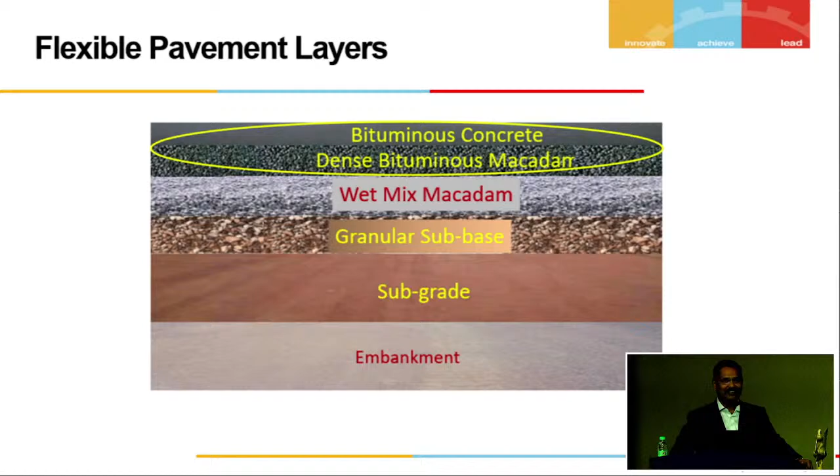A typical flexible pavement, which we all know, but I will concentrate only on the top bituminous layer, which is more than 50% of the cost. In that, it will only be the surface layer because the cracking is from the top, not from the bottom. The word sustainability was spoken a lot, and it is quite commonly used these days.

So I also put that design for sustainable pavements. Why do we design the pavements? It is to support the load, smooth riding quality, and good drainage.

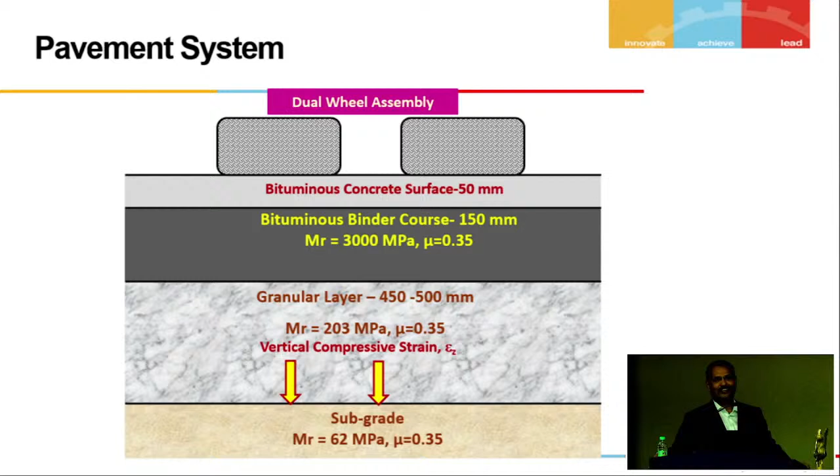Only two critical strains we consider, and we have been considering all these days. One is the compressive strain on top of subgrade and the tensile strain at the bottom of bituminous layer. But there is something beyond this these days. We also need to consider the shear stress between the tire and the pavement. That is what I will stress upon and speak on those topics today.

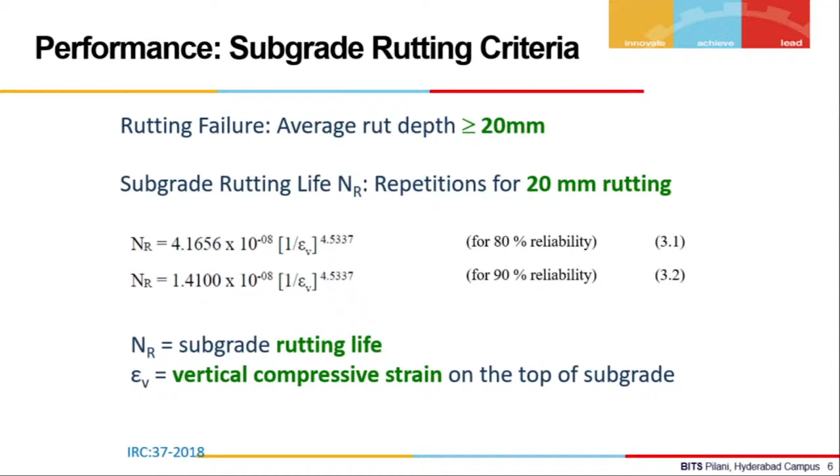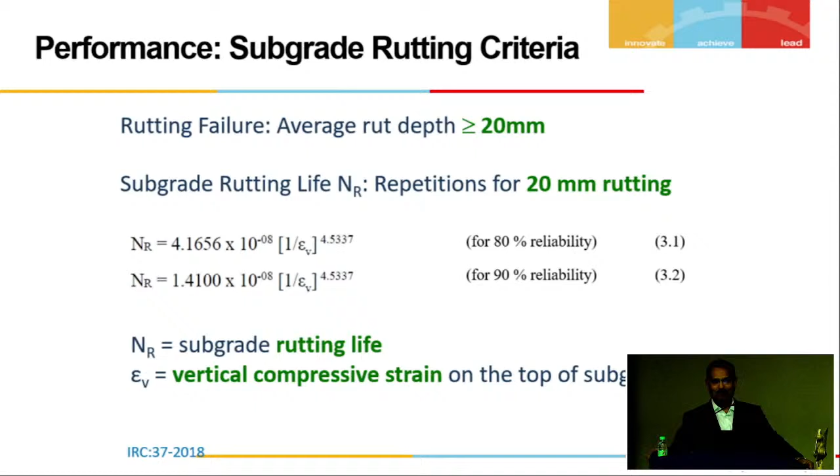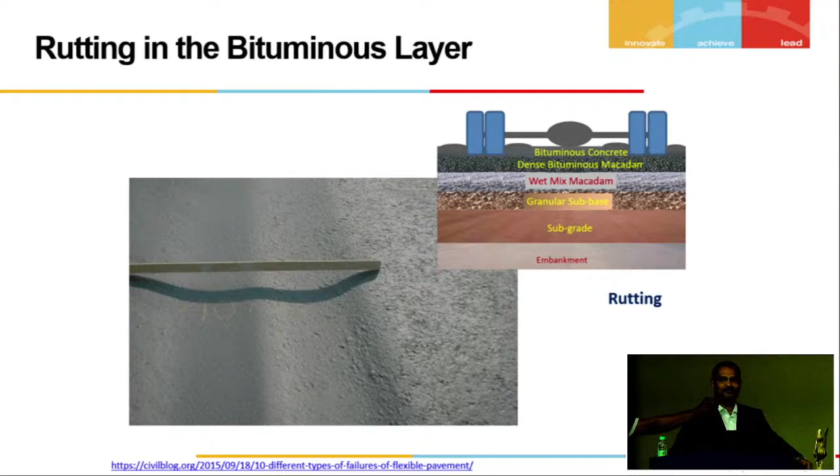We use the reliability equation. It is not the design reliability. It is only reliability to say how the subgrade behaves, and whatever rutting happens on the subgrade will get reflected on the top in this form. If I say it is rutting only because of subgrade, it may be true or it may not be. It could be because of the asphalt pavement itself. The rutting could be in the asphalt pavement itself.

And then we actually check for fatigue failure. Earlier it was very critical because the asphalt layer thickness was quite less. So bituminous macadam in open graded mixture was used. So there is high possibility of cracking from the bottom. But in present day, with the use of dense mixes like DBM, high modulus asphalt layers, this is not very critical.

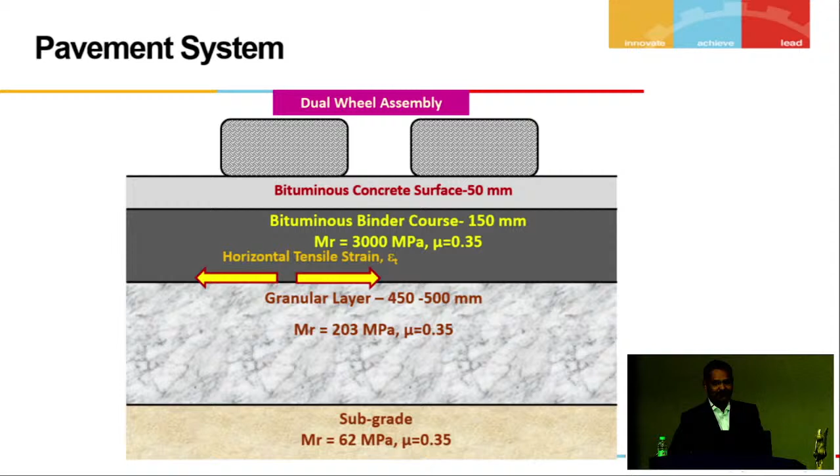Generally, we provide around 200 mm thick asphalt layer. It could be either at the bottom of the wheel or in between the dual wheel.

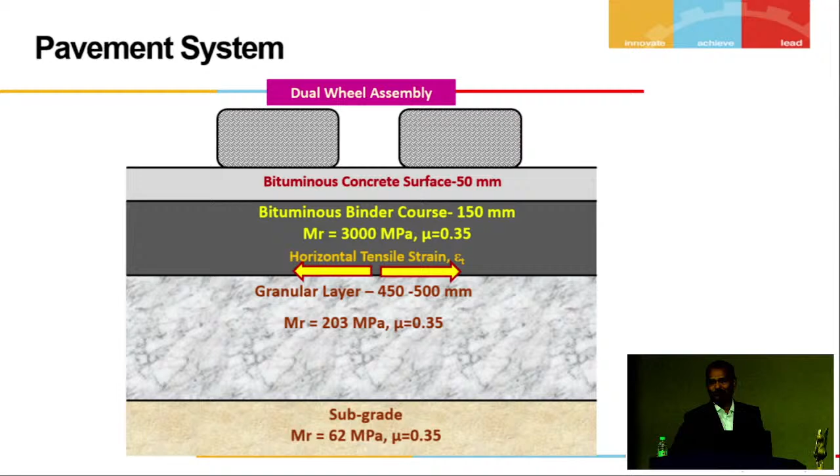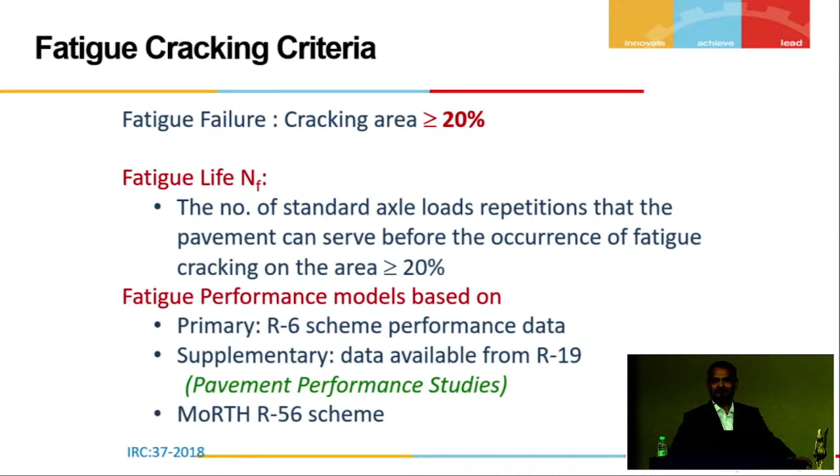But there is a lot of mistake happening because of this. We sit and design telling that the voids in the bitumen, or the effective volume of bitumen is 11.5%, air voids is 3%, but very, very challenging to achieve on the field. But when we design considering that 11.5 and 3% air voids, we get a C value in the range of 3. So our fatigue life improves by 3 times. So we reduce the thickness. Reducing thickness should not be the solution all the time. This is based on some of the observations what I have made.

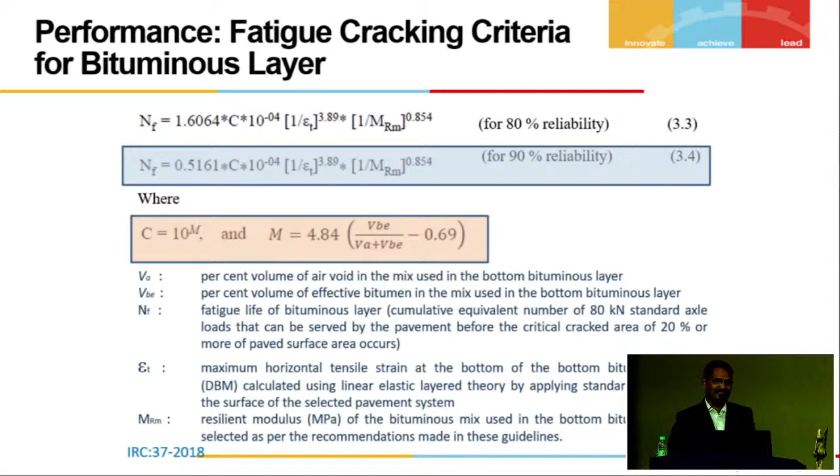There was a site where within 3 years, the rutting had occurred. And the rutting is so severe that it had gone up to 40 mm rutting. And they have used highly modified bitumen, PG76E-10. But still the rutting had occurred.

And then when they adopted this rich bottom bituminous layer, the thickness was 160 mm. But if you assume C as 1 and design the pavement, it is 250 mm what is required. Almost 100 mm saving, is it worth? And within 3 years it failed. It is supposed to last for 20 years. And using PG76, it is supposed to last for much more than 20 years.

And then we see this cracking, which is fatigue cracking. Generally, we have a feeling that it is only from the bottom, but just by observation, we cannot say whether it is from the top or from the bottom. But our design is considering that it is cracking from the bottom.

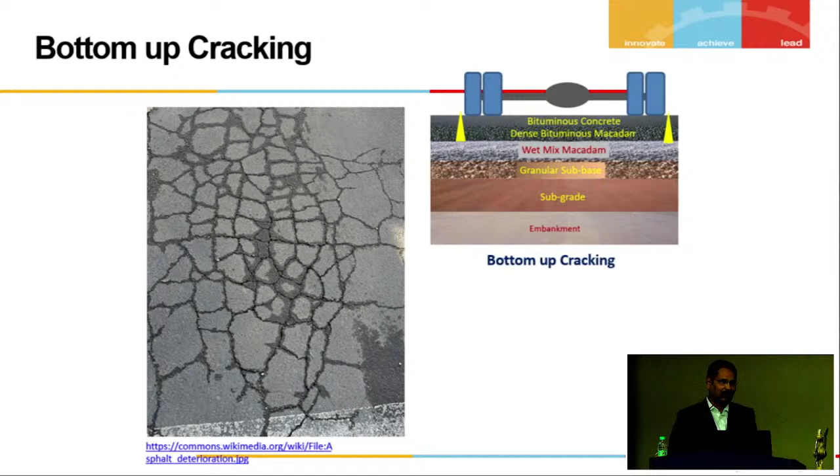And then we design based on traffic. We always assume that VDF given in the IRC.

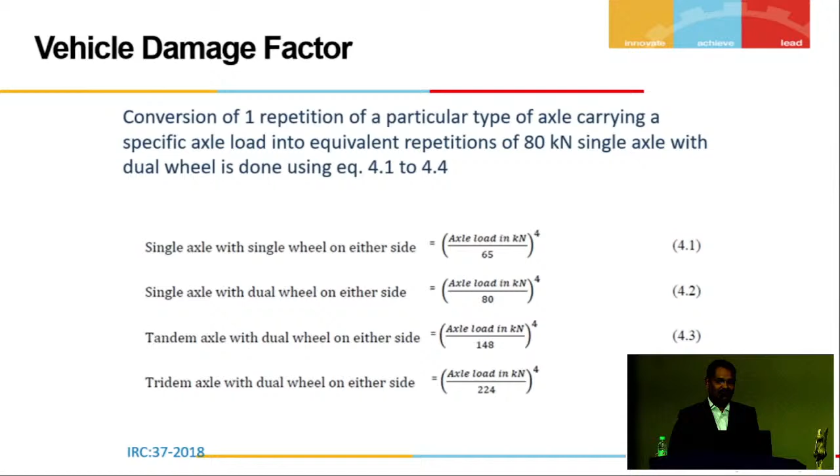But many a times that is wrong. I would like to quote one example here. We have to carry out the axle load survey. The former engineer-in-chief of Telangana had a very different design of pavement.

He used to do only 30mm BC, and paved many roads with the same budget, and it worked in many places. So I was appreciating him, and we were having a discussion. He said only one thing was bothering him.

There was one road which failed within 8 years, and that happened to be the former CM's constituency. It was in 2023, so he took me there and we went around. I asked, sir, what was the design traffic? He said 10 MSA, because this is a state highway but not much traffic on this road. So it was designed for 10 MSA.

Okay, fine. But within 8 years there was rutting, some cracks, and potholes too. When we were traveling to that road, I found many trucks passing by. I said, sir, if you give an opportunity, I would like to carry out the axle load survey at this location.

He said, please go ahead, and he also visited with me. His name is Shri Ravindra Rao Garu, with respect I call him Shri Ravindra Rao Garu. We went and did the axle load survey.

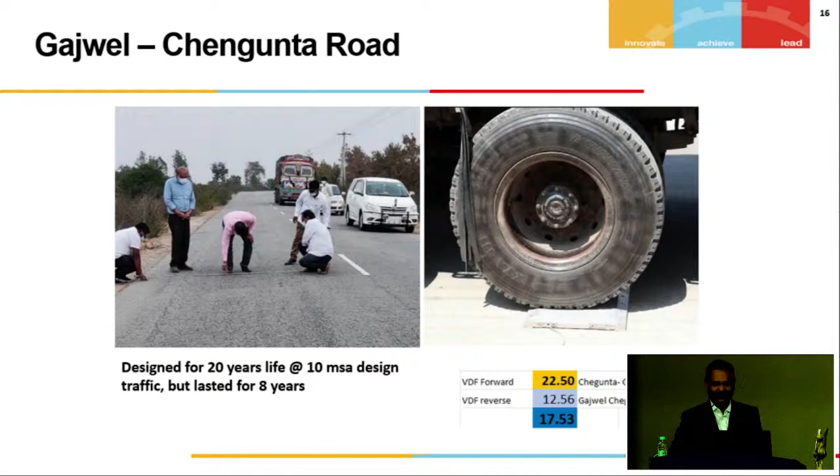So how do we achieve this sustainable road? Design-wise, yes, we did that. How can we achieve it? There are various means of doing it. Now what we take is the shelter of polymer modified bitumen, which is 1.6 times costlier than conventional bitumen. Or we can use fine-grained crumb rubber with encapsulation.

This was something which I did, and I have filed a patent on this. You can encapsulate crumb rubber so that you don't have to heat the bitumen. When you heat it, there is settlement. In cold form, you can put it into the pug mill and get the mix.

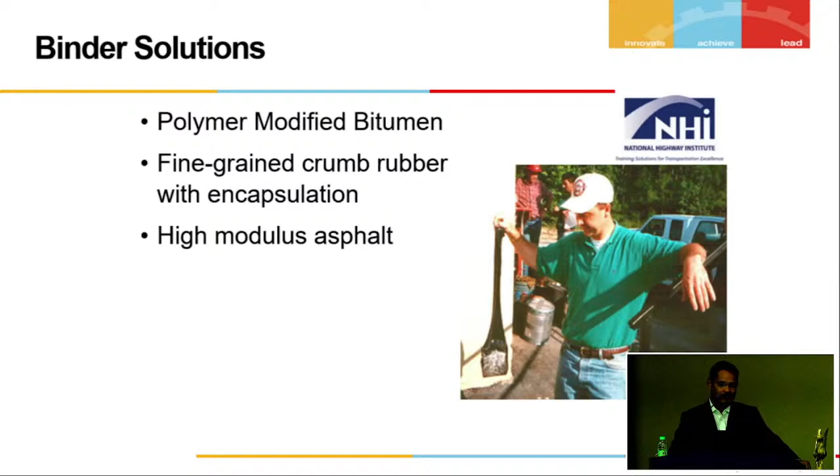I've tried it with various mixes, various number of times, and it has worked, but I don't know how it works at a big scale - that's what I'm waiting for. But in any mini mixer in your own lab with 30kg, it works, no need of heating the bitumen. Or these days we talk about high modulus asphalt, which is a DBM layer, so we get it from a batch mix plant.

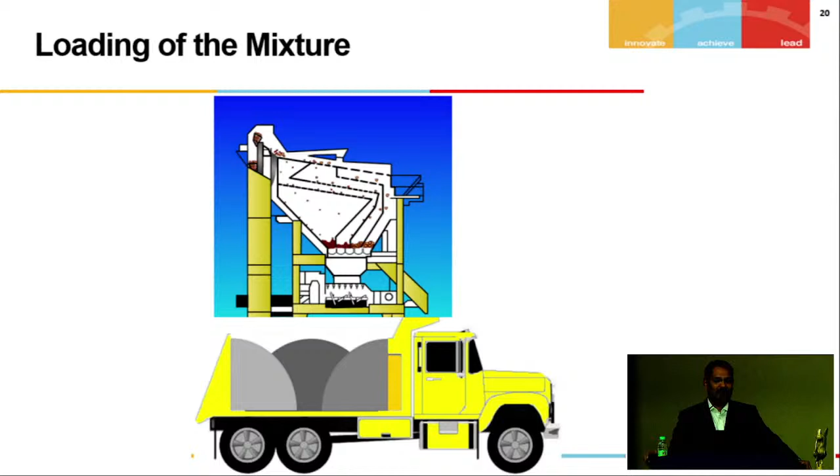And then we get it onto the truck, take it to the field, roll it, finish. We feel that we have done all our duty. We also check the temperature, we will see how the mix temperature is when it is rolling. If it is too hot, we allow it to cool down. If it is too cold, I don't know what to do there. And then we also check for density.

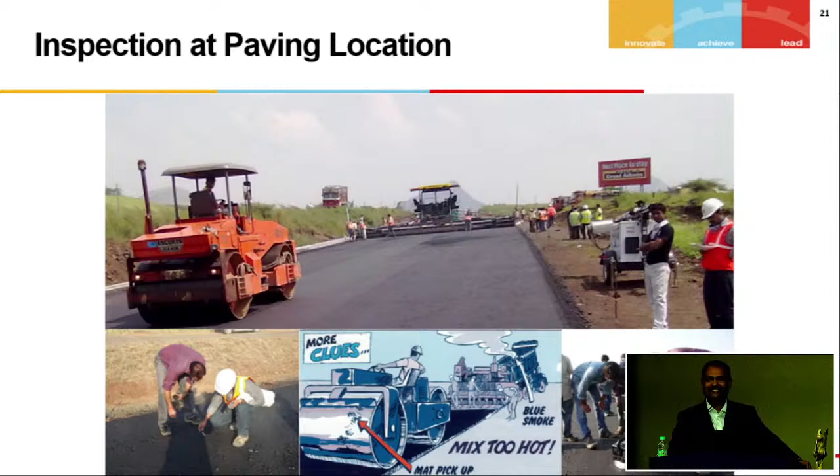All this is done. Or we can also use an infrared camera. We used it in one of the projects, from the plant to the site, how the temperature varies. This was for a warm mix asphalt, but it can be used for any other asphalt. You know how the temperature varies from the plant to the site on any particular day based on the temperature. So this gives an indication of when we finished our compaction.

Like sir was mentioning, everything is data driven. Yes, it is data. It is proven data. I can write the location, I can say what time, where, which date, what truck had come. So we followed all quality control.

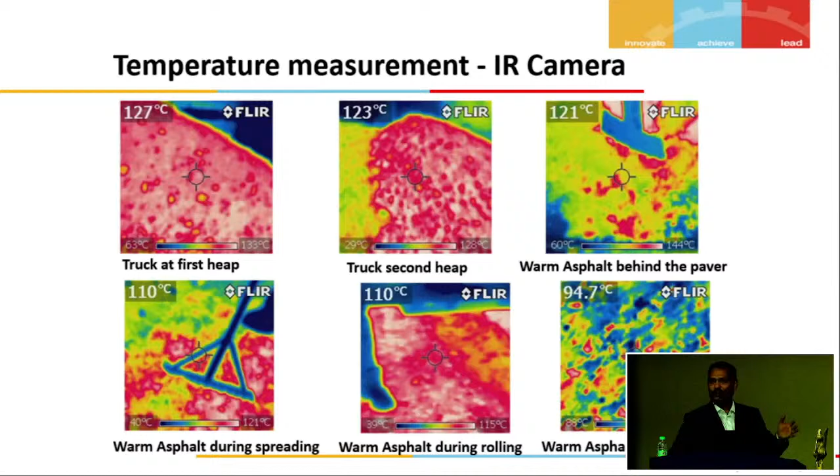And while rolling, we said let us follow 4 rules. What are those 4 rules? How many passes are required to finish the width? How many passes to achieve the required density? Whether the mix was hot or not, and what should be the speed of the roller.

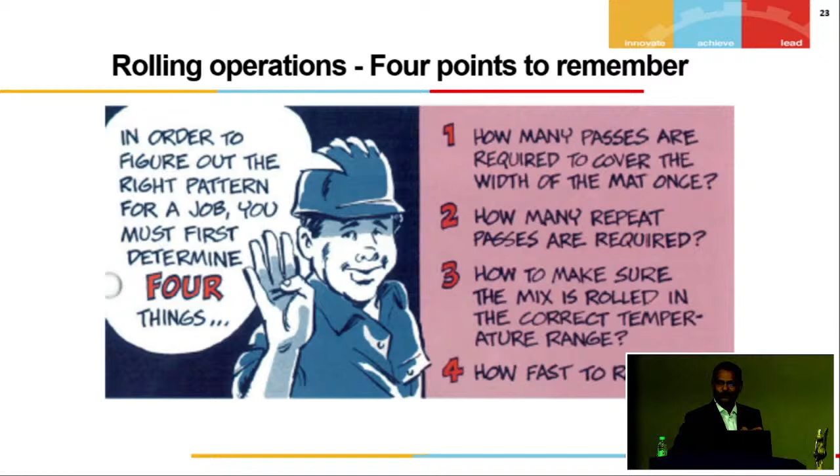All these are followed because every engineer wants to do quality work. Let us not blame any of the engineers here. They all want to do quality work, but still we get failures which are premature.

First thing, it goes with our perception. We have some experience, we go with the perception, not data driven. We see rutting within the first 3 years or first 2 years. In fact, I had predicted this will rut, and in fact it got rutted within 3 years. It is as high as 40 mm.

So the next blame we say is maybe the rich bottom bituminous layer. I cannot speak on this. As I told, if I give this question to AI, it will give me some answer. Maybe it is correct and maybe not. But I don't have that authority to speak on this, but this is an open statement, and it is a topic for thought, whether rich bottom is the one which leads to premature rutting. I don't know, it is still an open statement. It can go with perception, but not with data.

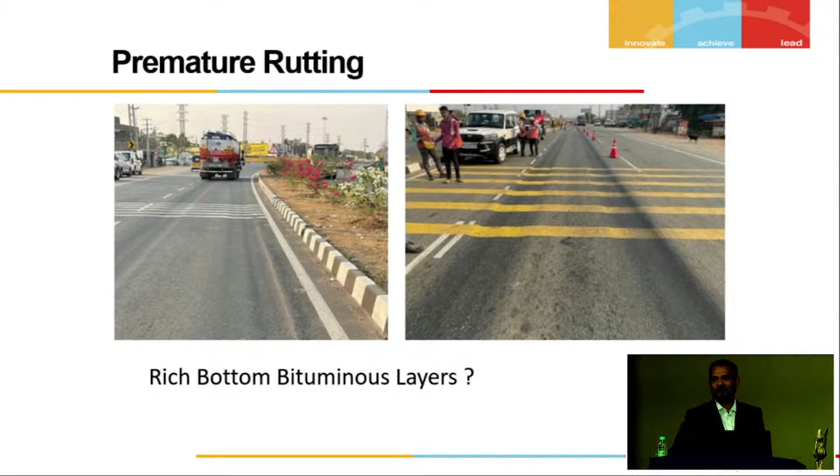The other one we see as premature failure is top-down cracking, which can occur within 6 months to 3 years from the date of construction. But it is very difficult to say whether it is from the top or from the bottom. The only way is you have to cut the core. It becomes destructive testing, but there's no other option. You cut the core to know whether it is from the surface or from the bottom.

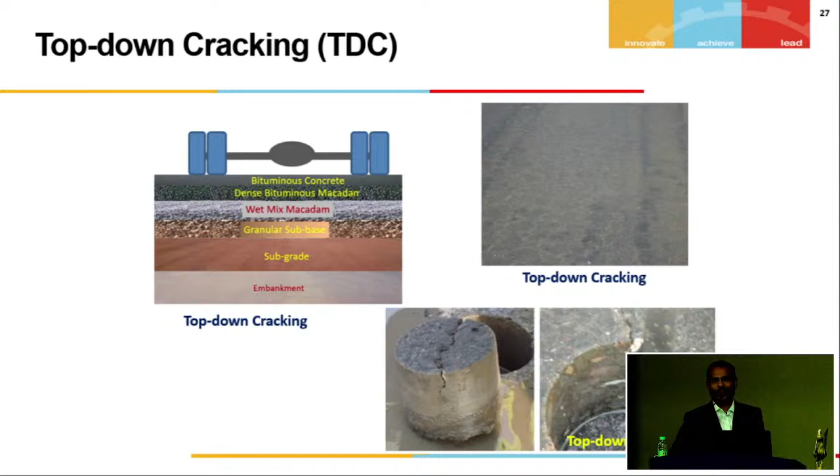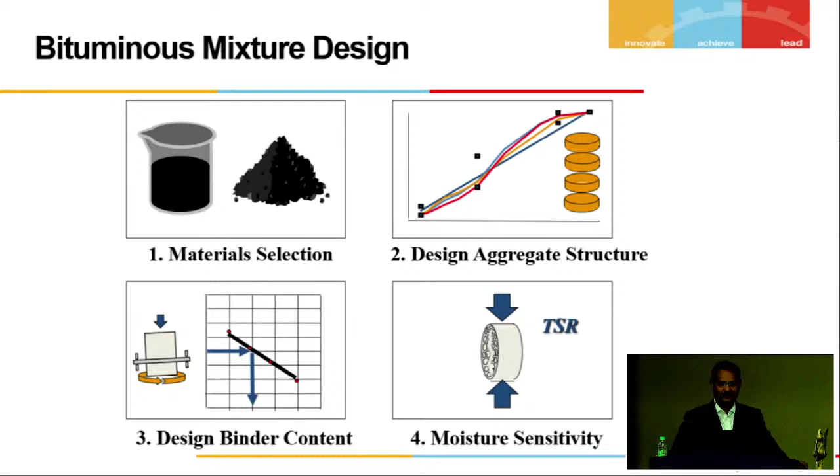So we always think it could be because of the mixture design, the gradation was not followed. All these are perception. Or maybe moisture damage, or maybe the aggregate was not coated properly, or the rolling pattern was not followed.

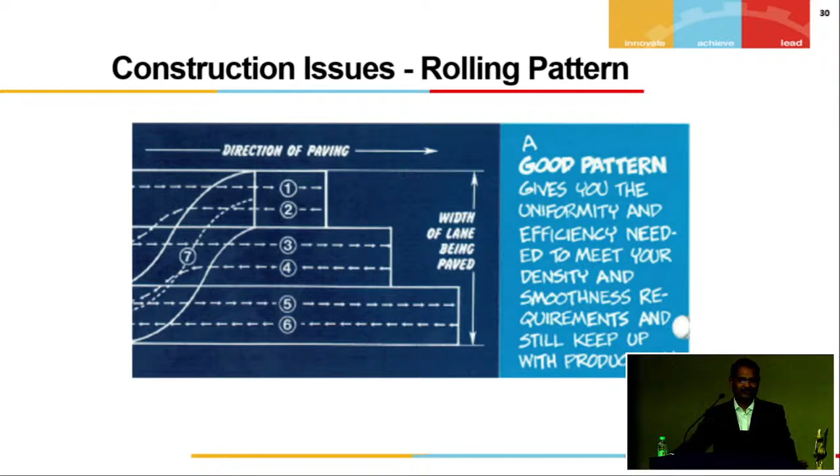I would like to give a different perspective. What could be the technical reasons? I'm not saying the other perception is wrong, there is no wrong answer on this earth. The only thing we look for is an appropriate answer. If you write any competitive exam, 4 answers will look similar, of which 2 you can eradicate, but 2 look very similar. Still we have to choose the most appropriate answer in a similar manner. What we have to see is the appropriate reason for this failure.

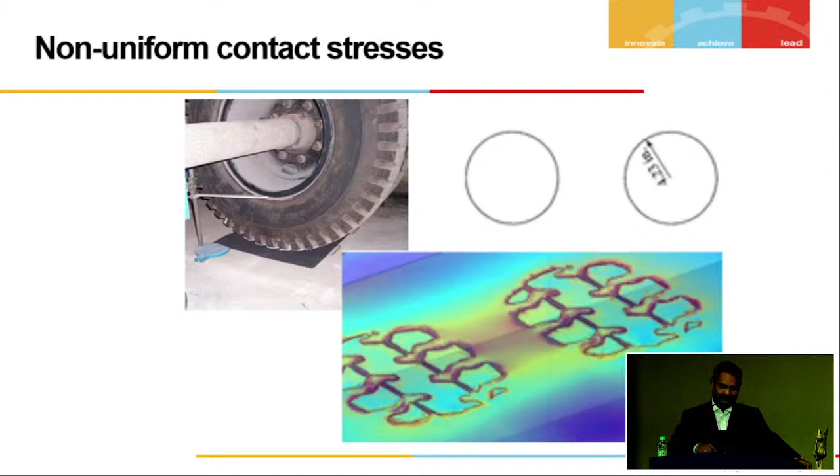Most of our layered elastic theory speaks of circular loading, but actually the truck load is never circular. It's not elliptical as well. And then the treads play a very, very important role. For the truck it is very good, for the road it is very bad, because it induces highly tensile stresses or strains on the surface, which is quite high compared to what the material can face. This leads to surface cracking, and this is one of the technical reasons.

And because of these treads, I use a 0.56 MPa tire pressure, but if I actually measure it, it is 0.74 MPa. Nobody will go with 0.56 though. I have seen trucks with 1.4 MPa. If that is 1.4 MPa, the actual pressure on the pavement will be 1.8 megapascal.

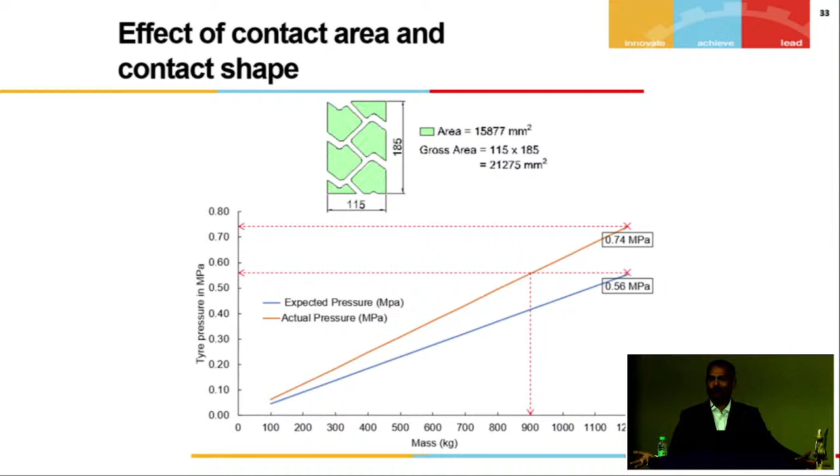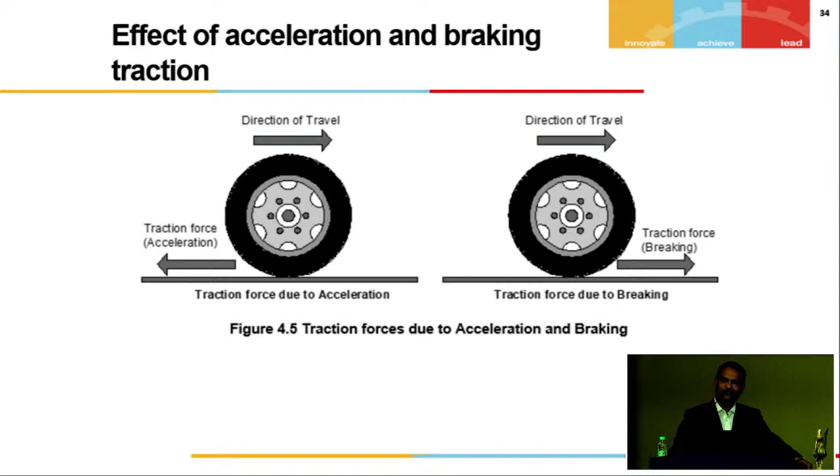Also, we always think of the truck as static in nature. It is not. We design the pavement for a moving truck. When a truck is moving, there is rolling force, acceleration, and braking. If you see on any approach road towards a bridge on the embankment, we see a lot of rutting or surface cracking. It is because of the change in gear, there is acceleration. So there is a traction force which comes horizontal along with the vertical load, and that induces surface cracking.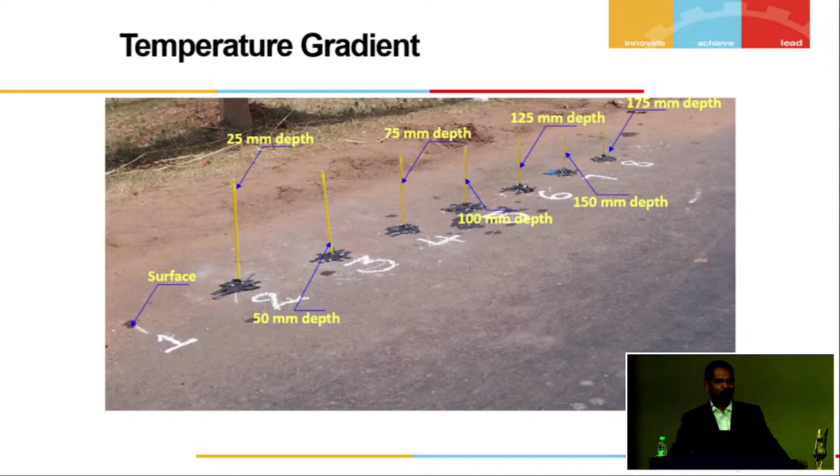One more reason is we always think the temperature along the depth of the pavement is uniform. It is not. There is a gradient within the temperature from the surface to the depth. So I measured it in one of the national highways, that was during my PhD time, and even now it is valid.

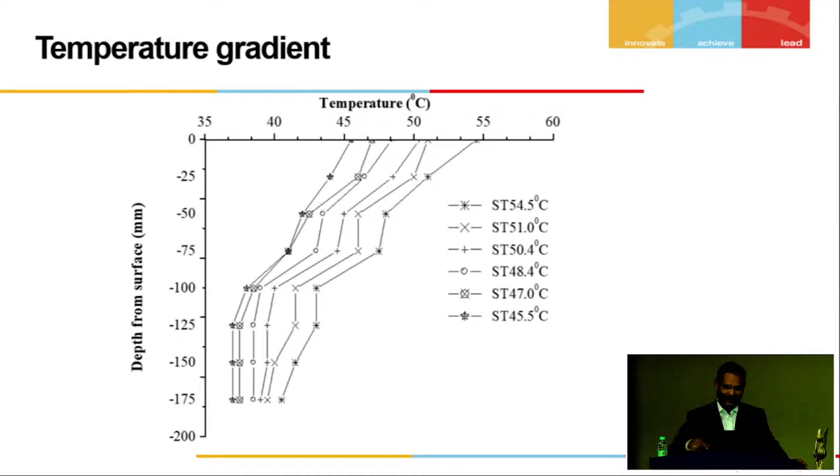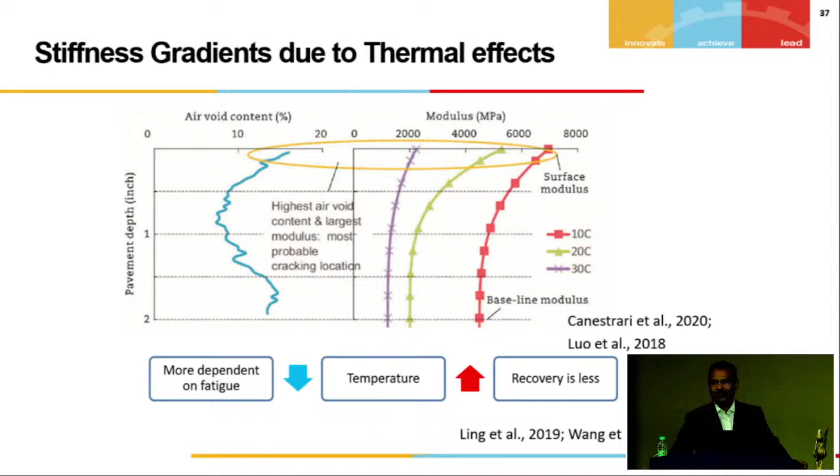Because of this temperature gradient, there is also a stiffness gradient. How does it matter when there is a stiffness gradient? When the mix becomes very soft on the surface and there is a rolling force or a braking force, there is a traction force which creates a transverse crack which will not be healed, because the top surface gets aged faster. The binder on the top surface ages much, much faster than what it ages at the bottom.

So I did not speak about this, about bitumen. Short-term aging, yes, as soon as the mix is done, it is short-term aged. Long-term aging happens over time, but if the air voids are more than 8%, the long-term aging within the top 20 mm is accelerated. This is not based on any literature alone, it is based on observation in the field. We have studied this for 3 years on a monthly basis, because if you go after 6 months, something would have happened and we don't know when it happened.

It is like observing a patient in the hospital every now and then. We observed it every 1 month, and thanks to Sri Ravindra Rao Garu, who asked us to take up this project on a monthly basis.

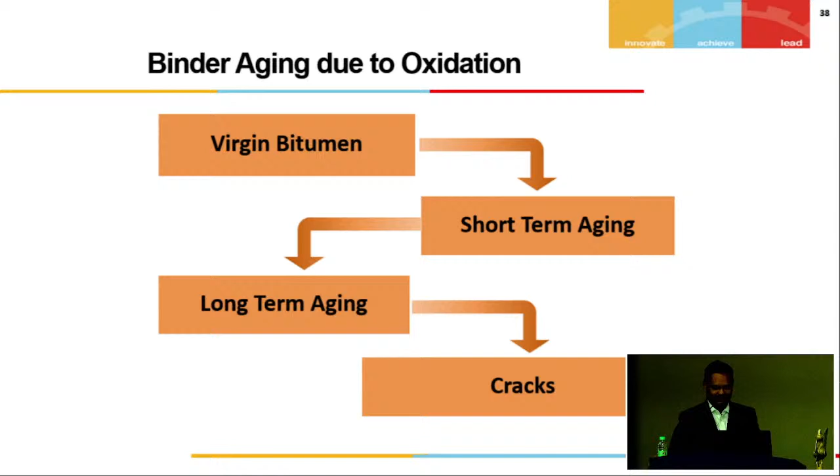It is very difficult to do this using the layered elastic theory, because the tire is not uniform along one side. You can't even do a 2D analysis. In USA, they can do 2D analysis because their treads are different from us—it's a steel radial tire. Ours is a nylon tire.

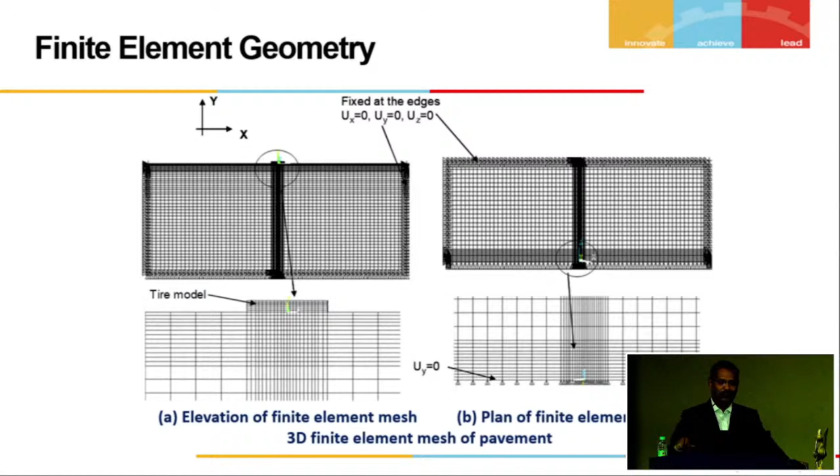What we use is a bias ply, a nylon at 45 degrees, one over the other, which will have 12 plies. So it is a 3D finite element. This was the typical tire which is being used in India. So we tried to find what will be the effect if you do a 3D finite element analysis.

And we have to use some failure criteria. I cannot just define and say that yeah, there is high stress and it fails. There should be some limitation, some reference point to say when does it fail. That's why in highway engineering or pavement engineering, we never consider stress for flexible pavement. We always consider strain, whereas for rigid pavement, we consider stress as the failure criteria.

So I had to arrive at some point, so I used octahedral shear stress, which is almost similar to that of von Mises, but in a different style. Here, ITS is the failure criteria we used, but we can also use the present-day CT index test as the failure criteria, though these are crack propagation, not crack initiation. These tests are only for crack propagation, not crack initiation.

A 4-point bending test would be ideal for crack initiation, but it takes a long time. So this is a very simple test. I use this and set 0.47 times of sigma yt based on some of the literature.

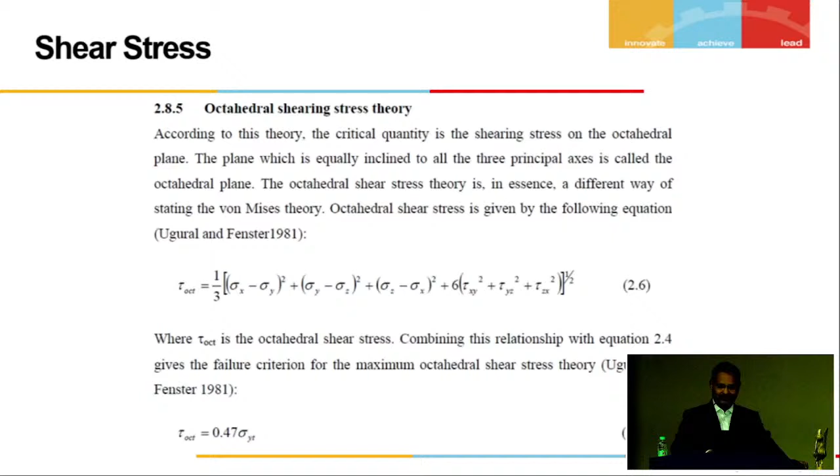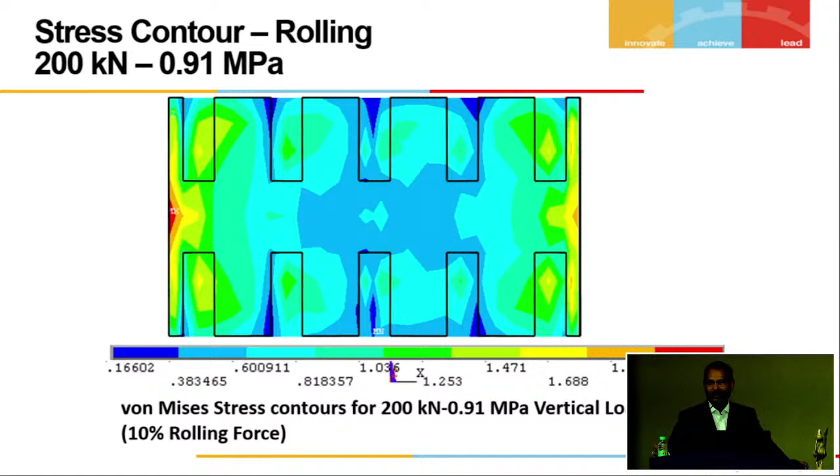But later on, it leads to map cracking, because once the initiation happens, it no more obeys Hooke's law. It is no more elastic in nature. The continuum is lost. The cracking can be in any shape. So along the wheel path, what you see is a block type of cracking or a map type of cracking or an alligator cracking, not only one single longitudinal cracking for the tires what we have in India.

And when there is a braking force, it is behind the tires, especially when there is a severe braking in the afternoon of a summer, you see a crescent moon failure on the road pavement, and that is because of the braking force. And one more thing is, the interface between DBM and BC will be smooth at that location, so that 40 mm or 50 mm just slides away, and what you get is a crescent moon failure.

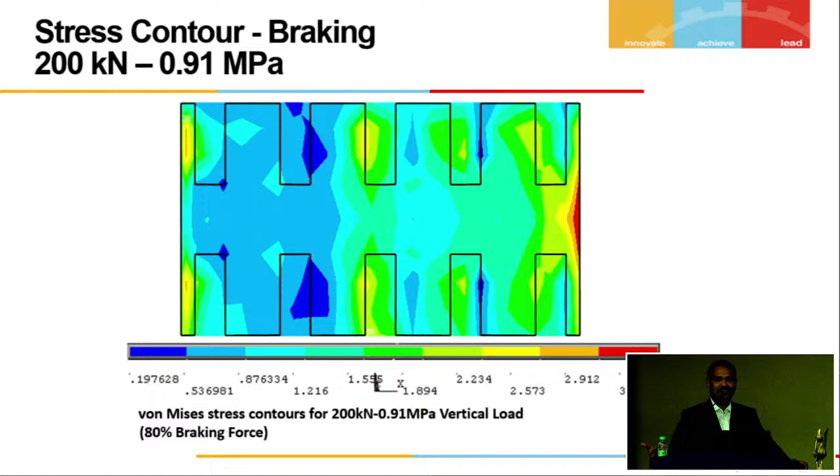I try to put that in the form of octahedral shear stress ratio. That is, whatever stress I get, the maximum stress divided by the octahedral shear stress value. You can see everywhere it is red, meaning every movement is critical. It can initiate top-down cracking.

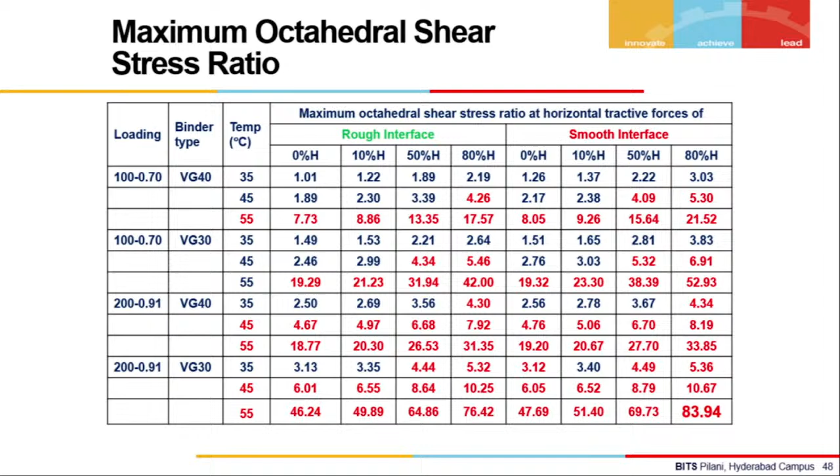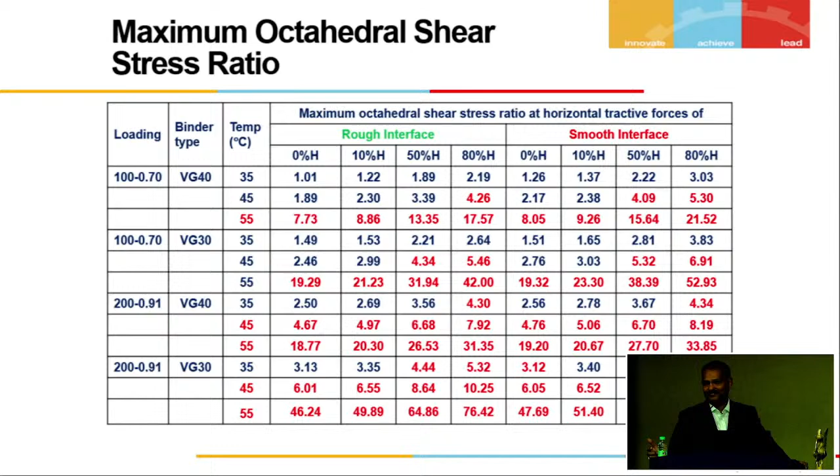If there is no healing effect, if the bitumen does not heal on its own, it is completely aged, it will definitely crack. But if there is a healing effect, the cracking will delay. It will take more time to crack than expected.

This is how a linear elastic theory gives. At the center of the wheel load, we say there is not much of a stress, but at the bottom, the stress or the strain is quite high. So that is a bottom-up cracking.

That is correct. But when we consider a tire as non-uniform contact stress, and because of the rolling forces, the stress on the surface is much higher than that of the bottom. What we use in most of our analysis is this type, but what actually happens is this one.

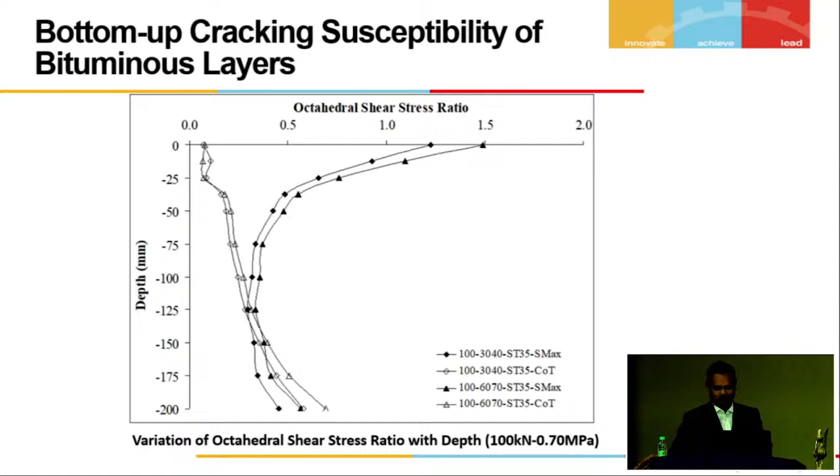So every pavement is bound to have surface cracking. I am not wrong, you can visit any site on the present day scenario. Within 4 or 5 years, whatever cracks we are seeing, it is not bottom-up cracking, it is top-down cracking. If the loading is increasing, this becomes even more severe.

And I mentioned about smooth interface condition. When there is no bonding between DBM and BC, what will happen? The stress between the layers is much higher. So if there is a crack initiation, it follows to full depth within no time. And that is for a standard load I have shown.

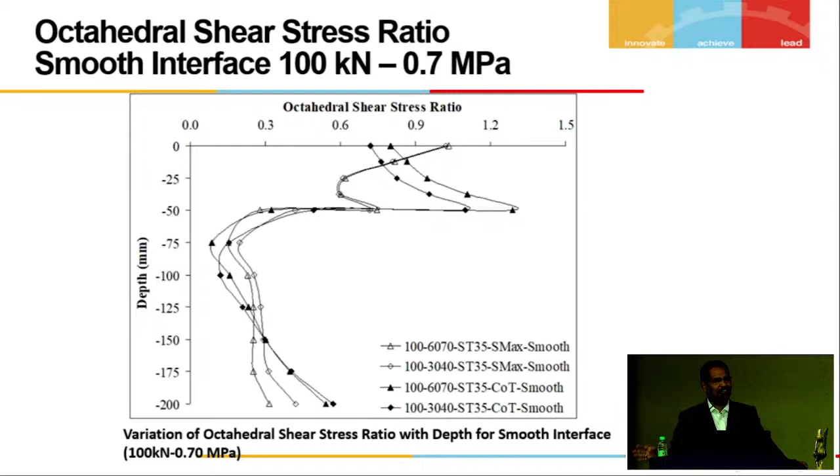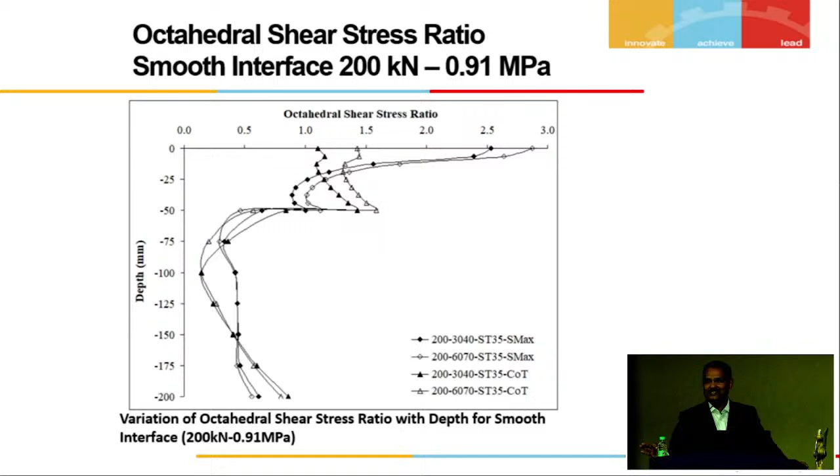If I want to express for a heavy load, even there it is critical. The surface cracks first, and it goes to full depth of BC layer, not full depth DBM I'm not talking about, up to BC layer. I will show a picture. Seeing is believing, I will show you a picture.

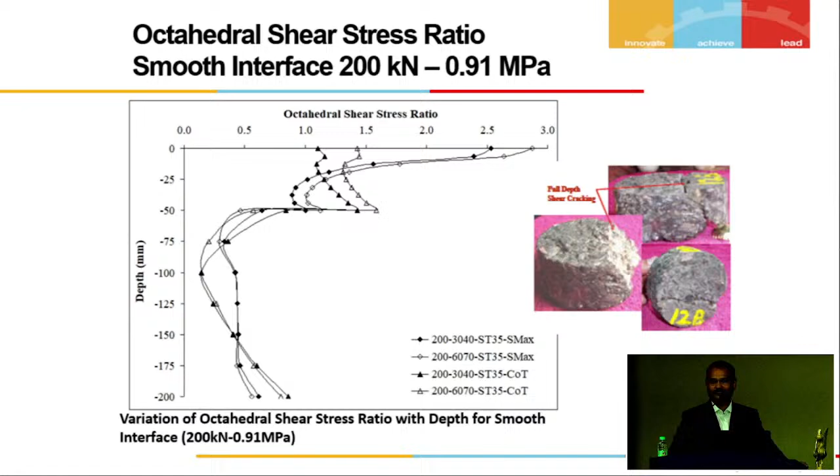So how to understand this? All this finite element analysis is all something like a black box. It does something inside, we don't know what is happening. How to do this?

Yeah, I am proud to say that I am also from Prof. Justo School of Thought, where we try to fabricate the equipment, not buy the equipment. There was one De Beer in South Africa who purchased an equipment and did the studies. The cost of the equipment on those days, 2005, it was 1 crore. We did it in 10,000 maybe.

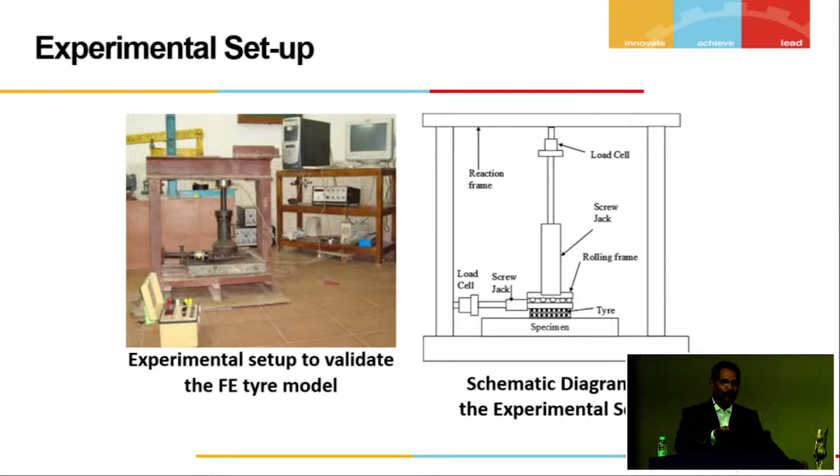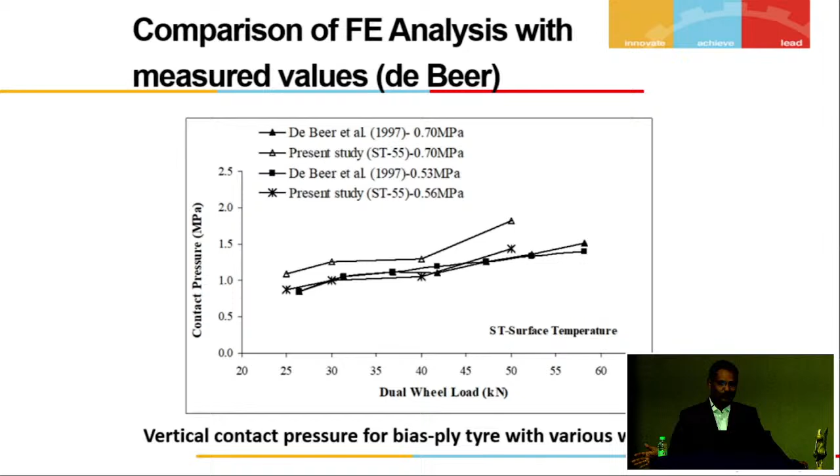And then we tried to simulate the tyre having a vertical load and then traction force. Our results were comparable with De Beer. It's not that it is completely the same as that, but it was comparable. That was sufficient to say what we are doing is on the right path. We are not away from what others are doing in the developed countries or developing countries.

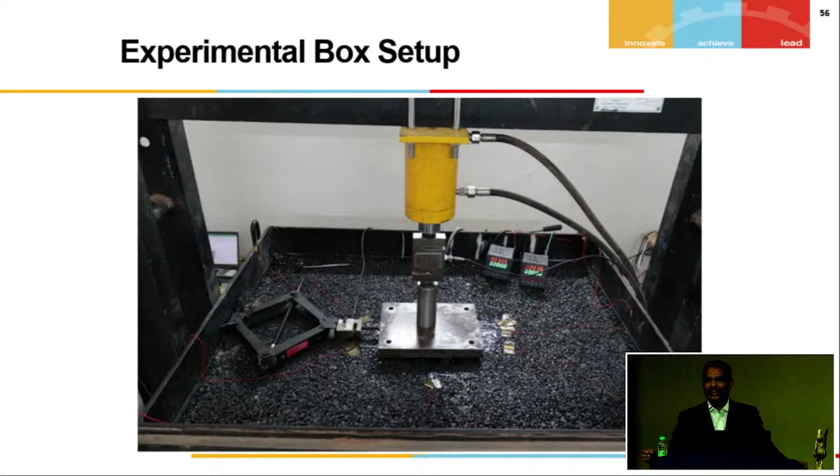So I modified further when I got a project from NHAI. Thanks to NHAI, they trusted me and gave me a project. I further tried to enlarge it to a 1 meter by 1 meter box and put the complete pavement, then tried to study different layers, maybe BC with modified binders, and then also stone matrix asphalt and gap graded rubber asphalt, which Professor Pandey was promoting a lot.

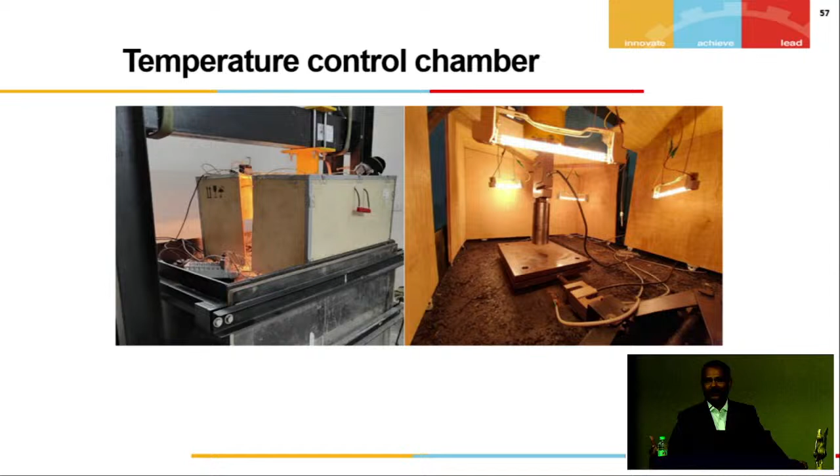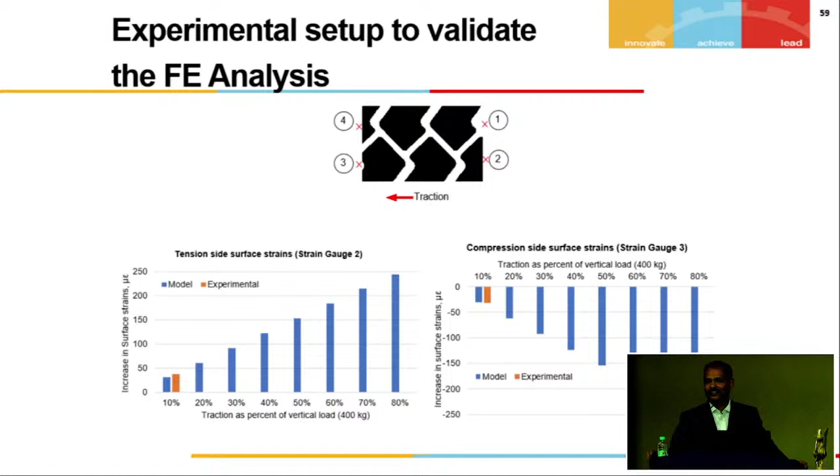And also tried to use some lighting arrangements so that it heats the surface and tries to age it to a certain extent, and use the strain gauges to measure the strains at the bottom and on the surface. Yeah, it was validated with respect to theoretical value, but I tried to measure using the recoverable strain. When we apply a strain, the surface gives some strain, but it also recovers back.

If you use a PMB, the recovery was much higher than when using a VG30 or a VG40 bitumen. So from this, we can infer at least that on the surface, when the traffic is heavy, we have to use a PMB. That's one of the reasons that we have to go for PMB.

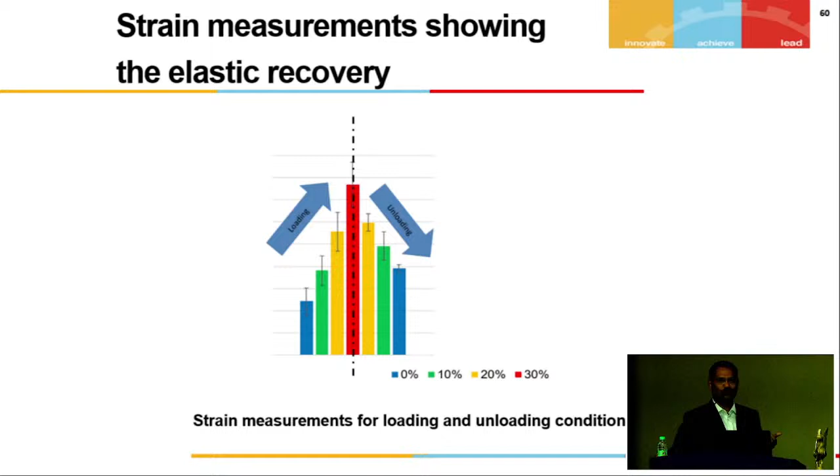I was still not happy with that box setup because it has a constraint. It is 1 meter by 1 meter. I can't pull and push like what is happening in the real field. So I tried to build a semi-field test track within the campus of BITS Pilani, and we used the roller and so on. And thanks to the R&B department, Telangana State, who helped us with all this.

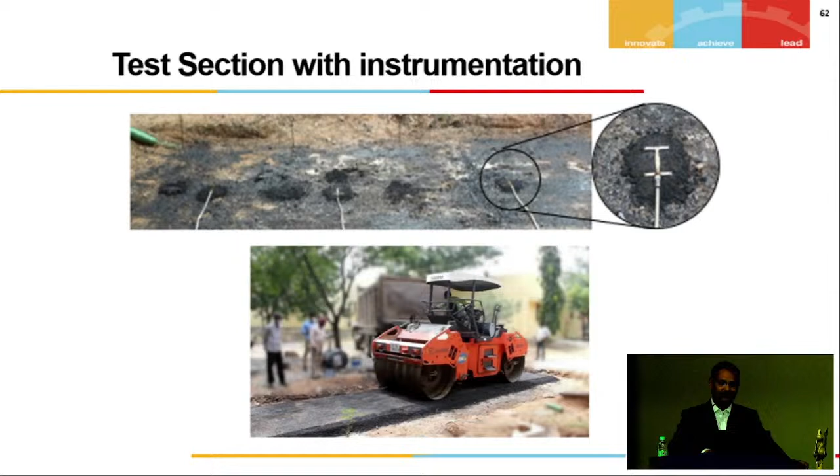Again sir, we followed the same Professor Justo's thought that we collaborated with the R&B department. That's how we were able to do some good projects.

The recovery of SMA was as high as 83%, even when the load was 12 kilonewton. But it was only 50% when we used VG30. And there is no aging, it is still fresh bitumen. Still the recovery was low.

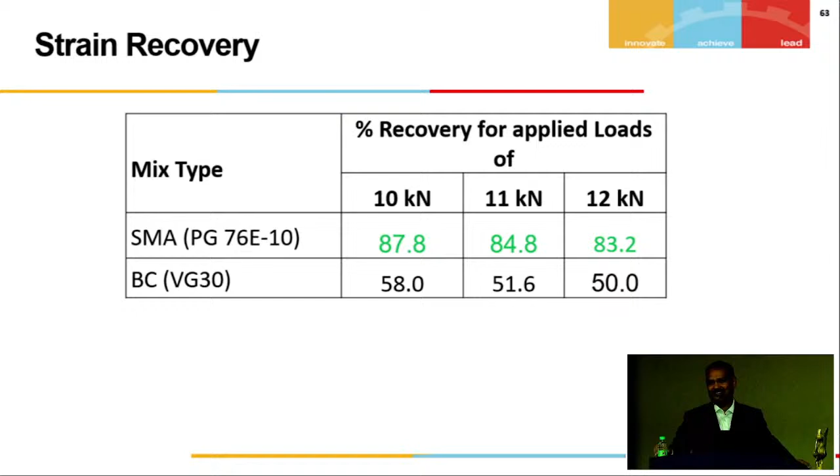So all these are laboratory studies. If I go and tell any engineer, please give me a project, I have already proven, they will say lab is not sufficient to fund you the project. And if I say we will do a trial section, so far I have not seen any trial section fail. A trial section is like, it never fails.

If you go to any petrol station, they will give one liquid and he will wipe our car, and the scratch mark goes away. And we get impressed and he gives us one water bottle. We say, no, whatever you have, you give that bottle, I will give you 5,000 rupees. He won't give, he'll give only that bottle.

So like that, most of the time, trial sections we do with lots of precaution and it works. So what I requested the ENC was, give a section which is already constructed. We will study it for 3 years. So then we can say what is the lacuna, or improvement required. I'll not say lacuna, a positive note would be how you can improve upon it so that your pavements will last longer.

His view was it should last for 10 years, but we were able to achieve up to 7 years. I should feel proud about that. We were able to achieve 7 years, not within 3 years - it didn't fail.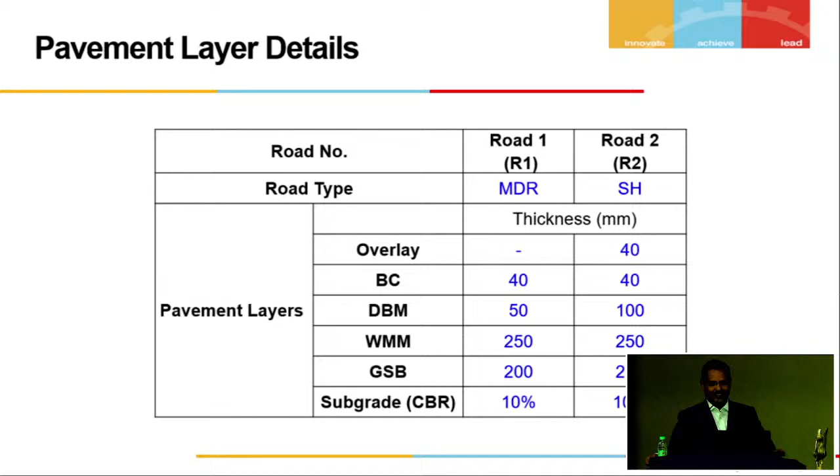We studied this every month after month. What was the study? It was a destructive study. We used to bring the core and extract the bitumen and see how much the bitumen has aged over time. But to our surprise, both did not have the same surface air voids, or the same air voids in the surface layer - the air voids was different.

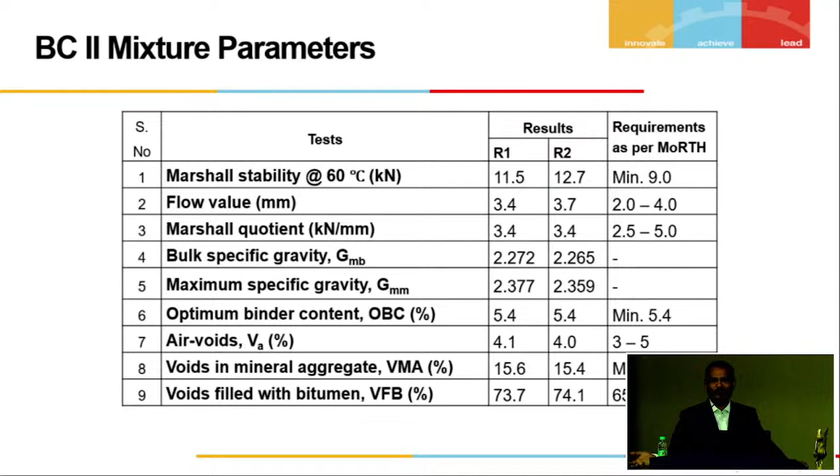When we cut the core and bring it, we found that the air voids were quite high for road number 2, and it was in the range of 7 to 8% for road number 1. And the traffic was less in road number 1, traffic was more in road number 2. Within 3 years, we could see some cracking on the surface. However, our predictions were 4 years. So 75% achievement, or we failed.

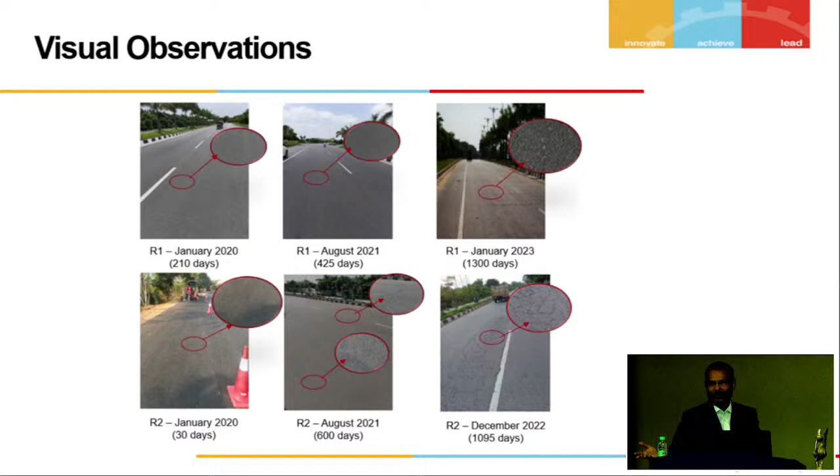I mentioned earlier that our predictions failed in principle because we only studied the bitumen property. Along with the bitumen, we need to see how the mix behaves. And how were the trucks loaded? We don't know about that. So there could be a reason it failed in 3 years, though our prediction was 4 years. But after the 4th year only, they had to do some patchwork.

You can see it was 7.5% to 8% air voids in road number 1, but 7.1 to 9.1% in road number 2. From then on, they made it a point to keep air voids below 8%. But we propose it should be around 6%, which they are still trying to achieve. It is not very easy.

But I want to make one thing clear. For the rich bottom bituminous layer, some contractors claim they achieved 3.5% air voids in the field, which is next to impossible. The only thing they do is reduce the GMM value so that it shows 3.5%. In principle, it is not correct.

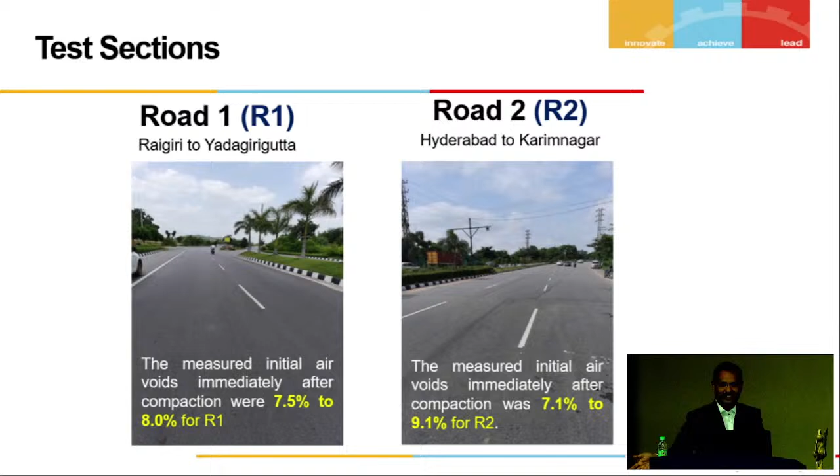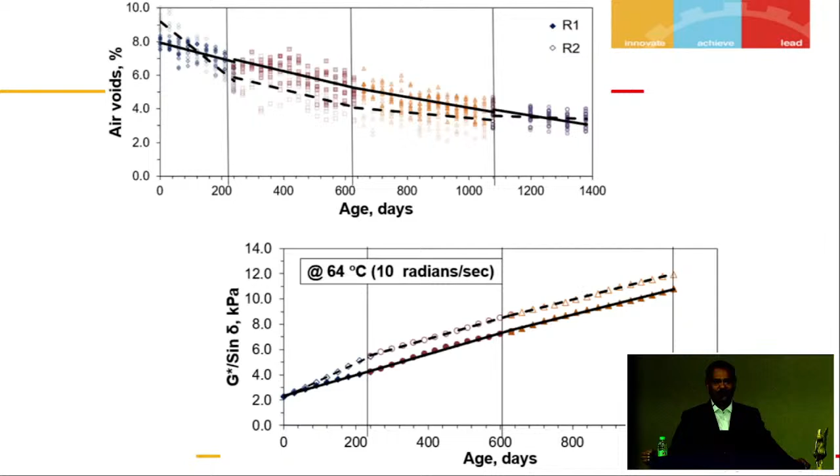There was no change in the slope. The first slope is only during the first 6 months, and that was sufficient to initiate cracking. So is the stiffness—initially it was high for one road, low for the other, but otherwise they followed the same trend.

So the prediction was 4 years and 5 years. What was the prediction based on? We do a pressure aging vessel test where you heat and age the bitumen, simulating 7 to 8 years of actual field condition. But we were not able to reach that level in 7, 8 years—because of higher air voids, it was reached within 4 years for one, and 5 years for the other. Now that it has completed 5 years, it is not correct. The only reason is mostly car traffic, not the truck traffic as estimated.

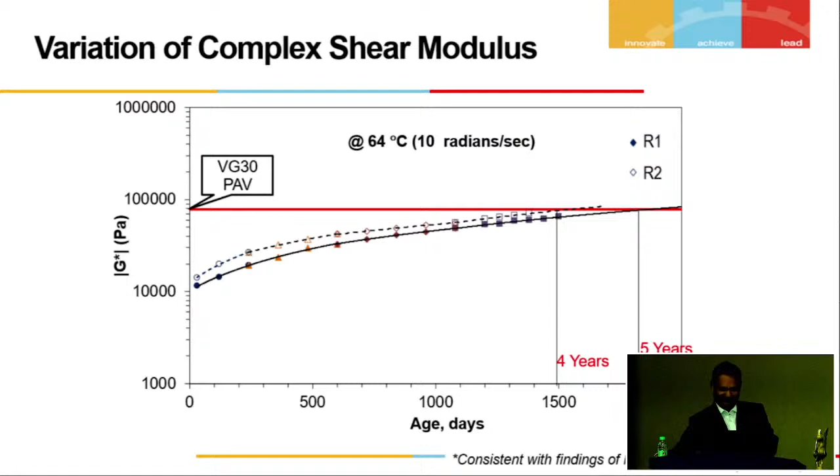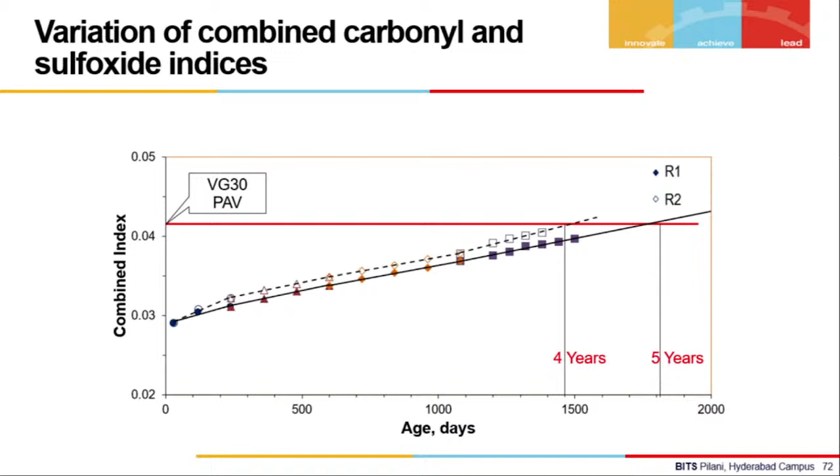The other aging index was also measured. Even there it said the material can last for 4 years, but it started cracking from 3 years only. I was mentioning about this CT index, cracking tolerance index. It's a very simple test, and it gives an indication of whether the material will sustain or not.

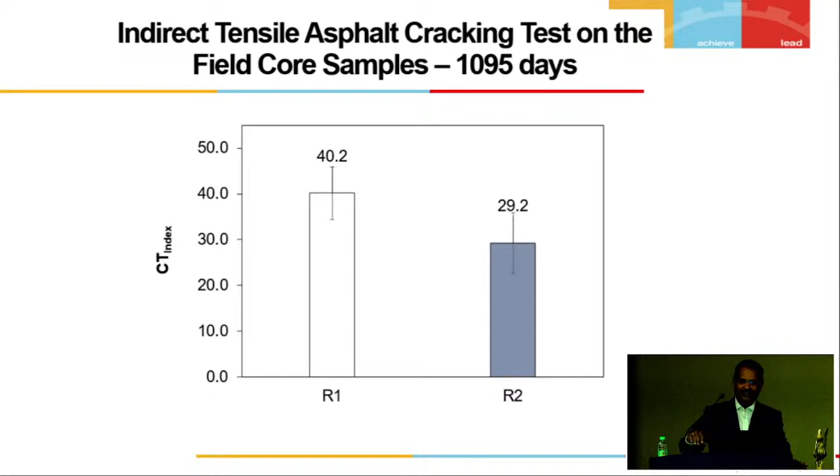For road 1, it was 40.2. It is just a relative value. If I do it with a PMB, it will give around 65 to 70, showing that the mix can sustain more loading without cracking, without initiating surface cracks. But in this condition, it showed that road number 2 cracked faster.

How to understand this? The aging has occurred only in the top layer. We sliced this into 2 parts, and if I check the softening point, it is still not a better indicator. So what we did was a DSR study, which is generally used for polymer modified bitumen, to find the recovery of the bitumen. The recovery could be because of polymer or rubber, but in this case, the recovery was only because of the stiffness of the binder.

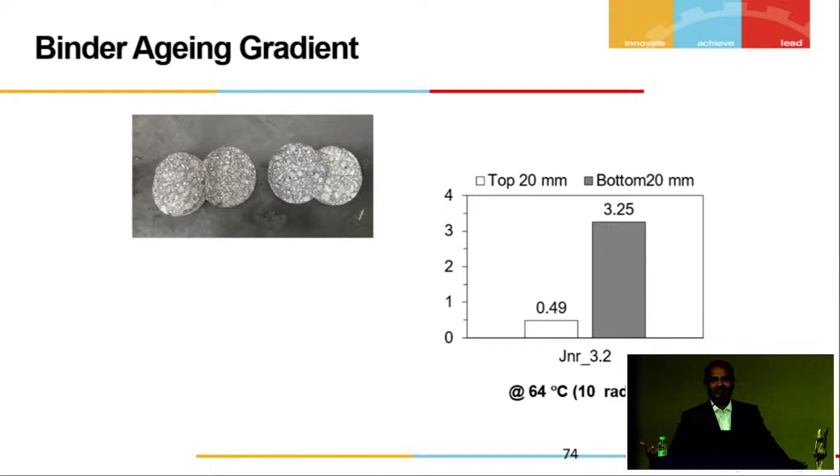If I try to give a torque to steel, it will not rotate, but still something has happened and it will come back to original. But if I rotate rubber, it completely rotates and comes back. That is elastic; the other one is only stiffer. Here, what we had was a stiff binder.

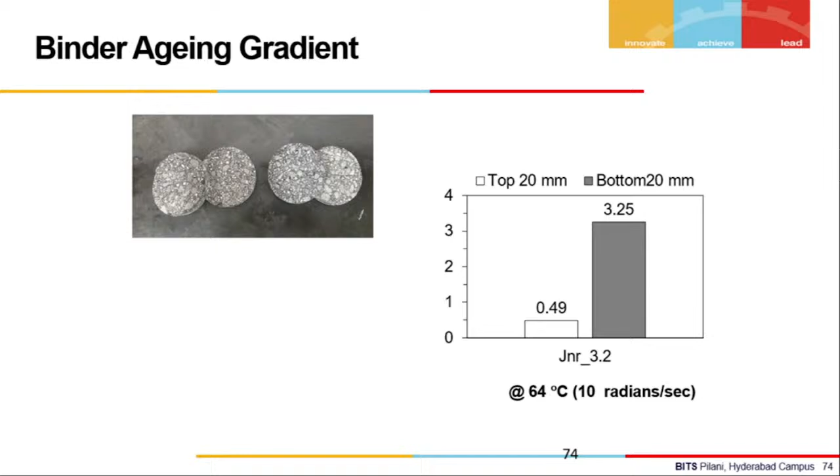The first top-down cracking we saw was on Bangalore-Hosur Road, the first project of L&T, and Professor Veeraraghavan had sent us to that location. We went, saw it, and with our own knowledge said you could do resurfacing, fog sealing, whatever we had learned, we tried to suggest. But looking back now, that was top-down cracking—the first project of L&T, Bangalore-Hosur Road, it was top-down cracking.

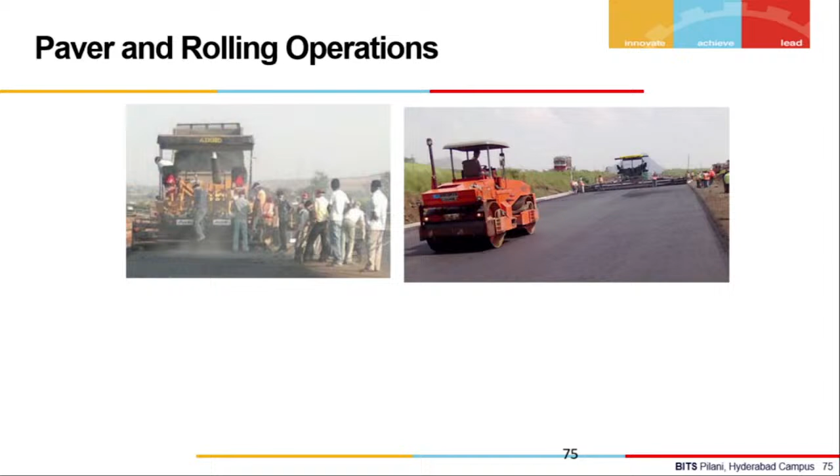I want to mention one thing here. Whenever there is a paving operation, most of us who go for inspection stand behind the paver. We make a big deal of it, like it's baraat. But the roller is treated like an orphan, nobody even bothers to go there. And that fellow will start rolling whenever he wants.

Most of the roller operators were actually pouring water to the roller, then got upgraded and promoted, and became operators that way. He says, the previous person did it like this, so I do it like this. So they never listen to us.

But once our presence is there, it can still make a difference. This is one scenario in a paving site in India. Nobody bothered about the roller, but everybody was behind the paver. Even when engineers go for inspection, all of us go behind them and stand on the paver. That is a machine, it can do any work, but the roller is manual, so we have to be there.

I would like to show one more example. This was in another country, China, which we always compete with. Nobody was behind the paver, but whoever officers came, they only went to the rollers, observed how the rolling operation was, and then went off. They did not say anything, they just observed the roller operation and left.

You can see the smoke from the roller, when the roller is moving there was huge smoke. They achieved density, and once the density is achieved, there is no question of failure. All this top-down cracking in the field, I said, was only with respect to air voids. Higher air voids, higher aging, and then top-down cracking. If the air voids is lower, brought down to 6% of GMM, then there is no premature failure.

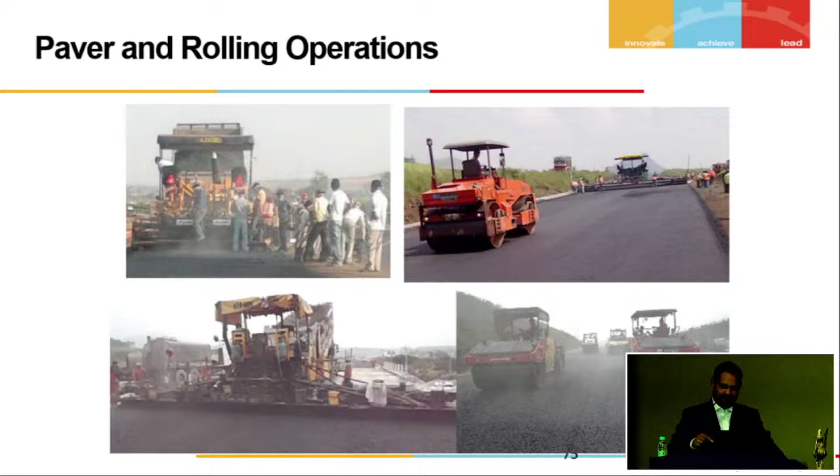With this, I would like to end my lecture, but I would like to share a few memorable pictures with our beloved professor. Most of us meet many people and they stay in our memory, but very few people become a part of our life. Professor Justo is one person who will be a part of my life. I would like to share a few pictures which are always with me.

Wherever there was an interaction or some conference with Professor Justo, I have never missed it.

I would like to end my lecture with one statement. I heard this statement in 1996, in the first lecture Professor Justo gave us. Uday was mentioning it was told by Shri Abdul Kalamji. I don't know about that, but what I heard from Professor Justo was: teachers are like a ladder, they help us climb and reach heights, yet they remain steadfast in their position, providing guidance. If I want to see the meaning of simplicity, I just look at Professor Justo, and I think I'll get the meaning without needing any dictionary.

Thank you very much for your patient hearing, and thank you.